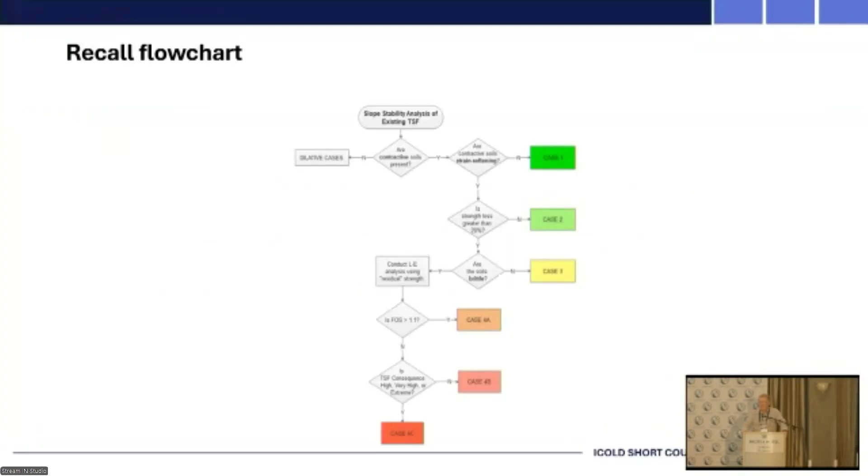So, talking about limit equilibrium methods, this is a flowchart. I said recall the flowchart. In fact, it's preceding the presentation on the flowchart that's going to be given directly after my 3 presentations, about different cases and how to deal with them, dilative versus contractive and so on. I'm not going to dwell on that, but hopefully there's some links with that, and also with what was said by Mauro. Now, in terms of the types of stability analyses, to try and encapsulate the way currently used,

a drained analysis that's appropriate to dilative soils uses effective stress parameters. There's no excess positive pore pressures present from shearing. You can use limit equilibrium using the friction angle, targeting a factor of safety. And that's what's called for in current documents, things like SANCOLD, etc.

Undrained analysis, which some people have taken a while to accept, is assessing the likelihood that contractive undrained shearing could be initiated. You could do limit equilibrium, or increasingly numerical modeling. We've had a student recently do comparisons using 2 different software packages on a calibrated Norsand model, and you don't get the same answers. So we do have to be a little interrogative of numerical models.

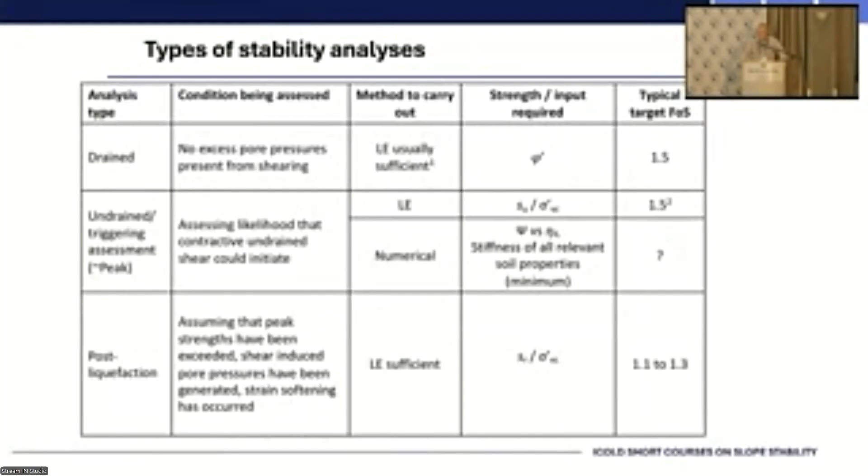If you use limit equilibrium with peak undrained shear strength, you target a factor of safety of 1.5 again. And then post-liquefaction—I prefer the term large strain—assumes that peak strengths have been exceeded, and we've generated positive excess pore pressures in that process, initiating some form of strain softening. Currently, limit equilibrium is the go-to, but this is where things get quite gnarly, and where we're going to maybe have some debate today: what target factor of safety do we use, what strength ratio, how do we derive it, etc. And the implications, which some of you are painfully aware of in terms of costs of buttressing. But this is where we are currently.

It's by far the most widely used approach at the moment. Most design offices will have people working on stability analysis using limit equilibrium, but it does suffer from limitations. We've heard some of them today, particularly for soils that are brittle. And what is brittle versus merely strain softening is perhaps another long debate. But when talking about progressive failure or static liquefaction, these methods do have limitations, certainly. And specifically for highly brittle tailings—tailings that lose strength over a very small amount of strain—you have very significant stress redistribution.

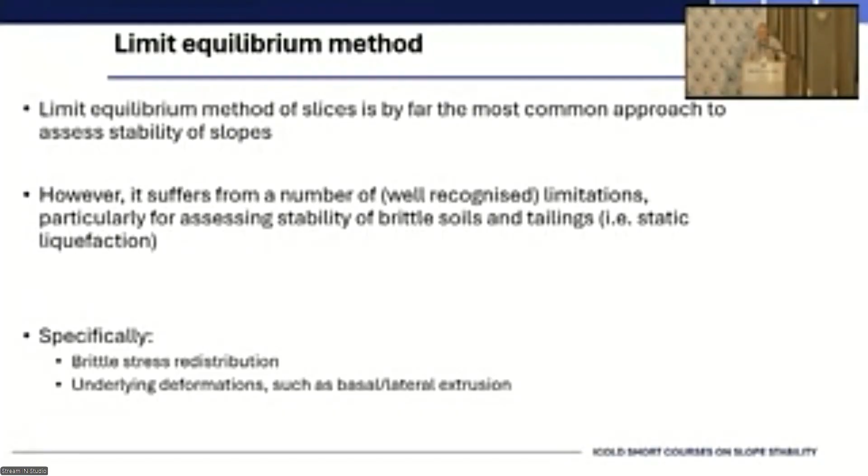And then there's also the lack of accounting for different strengths. Andy was mentioning that in terms of the Mount Polley case, you've got different stress-strain curves, so you may have a very brittle tailings overlying a ductile foundation. There are all these limitations, but sometimes these limitations are not as restrictive, and you can use limit equilibrium with a little more confidence. But nevertheless, we do recognize these.

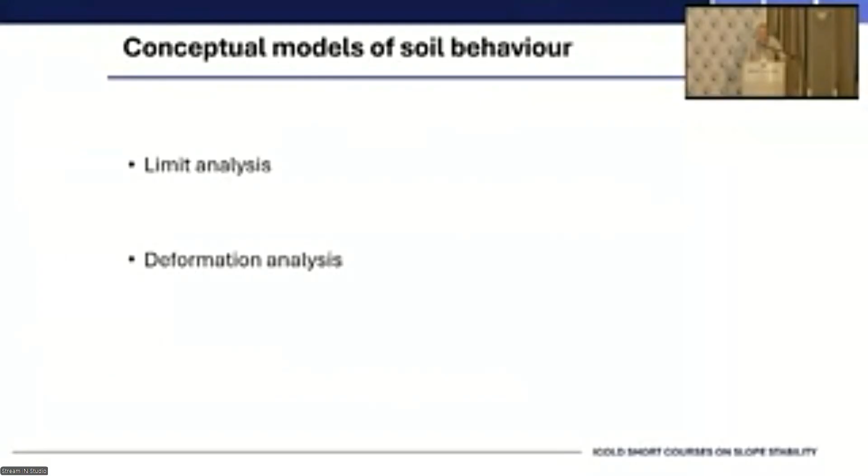It's purely something in space that's just been subjected to stresses, and once you mobilize the limiting strength condition, that's when failure occurs. As Mauro was showing you, implicit in the assumption is that you get the same strength mobilized at the base of every slice, which we know is certainly not the case for brittle type failure.

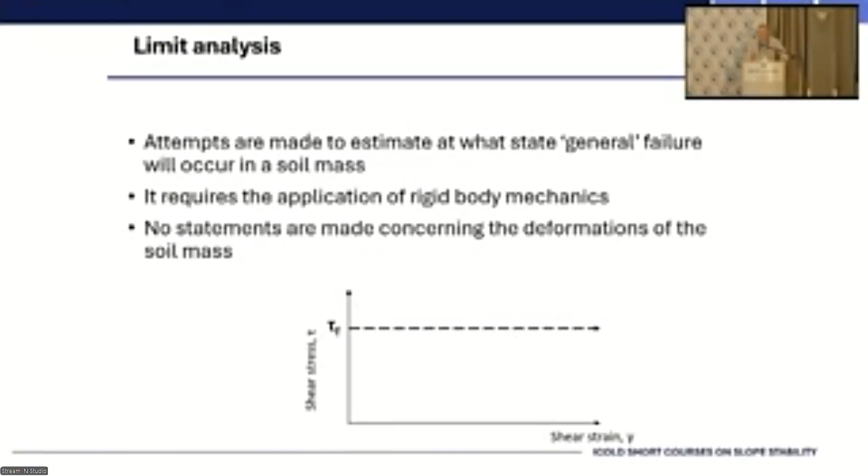Undrained strength is expressed such that the maximum shear stress is the undrained shear strength. Often we then normalize that with the vertical effective stress, and thankfully software programs these days can incorporate that pretty successfully, because you do get this effective consolidation with depth, the sample gets denser, hence the undrained strength is greater.

Contrast that with the drained strength, where we have these two components. I think everybody's familiar with that. But then that bottom statement is something that Louis touched on yesterday: the key to having a drained condition is the fact that the shearing is applied at such a rate that the excess pore pressure generated can be dissipated faster than the rate of load application.

So in a sand, normally if you're applying a shear stress, say building a high-rise structure, the rate of construction is such that the pore pressures dissipate far quicker than the rate of loading applied. But if we apply the load faster than we can dissipate, we can still get these excess pore pressures in sands, and hence we get undrained type behavior, that shear-induced pore pressure.

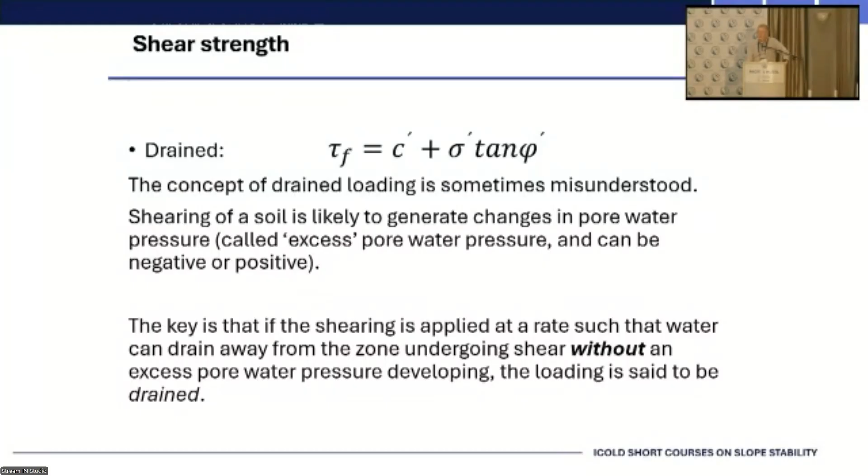The second way of thinking about a soil, certainly to start with, was the initial approach of a deformation analysis. You've got stress and strain, you've got the Young's modulus, the relation between them. If you do a simple elastic analysis, there's absolutely no limit on the amount of stress you can generate. You don't have a condition. So we all know soil is completely different to that.

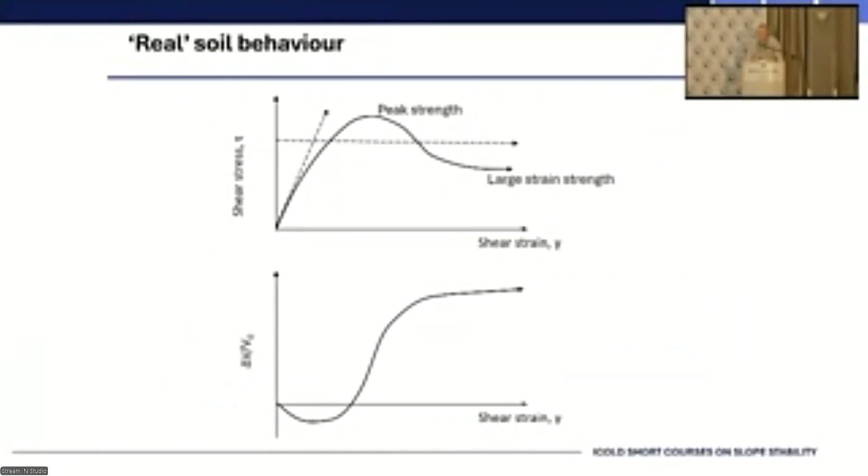We get maybe an elastic, pseudo-elastic behavior to start with. We get a peak strength, maybe a large strain strength, etc. I'll just superimpose those two simple models, the rigid body and the elastic, on that. But we have to actually have something that incorporates both of those, and not only that, but takes account of changes in volumetric strain - that's the bottom curve there, volumetric strain over, or change in volume from initial volume, or change in pore pressure. So it gets far more complicated.

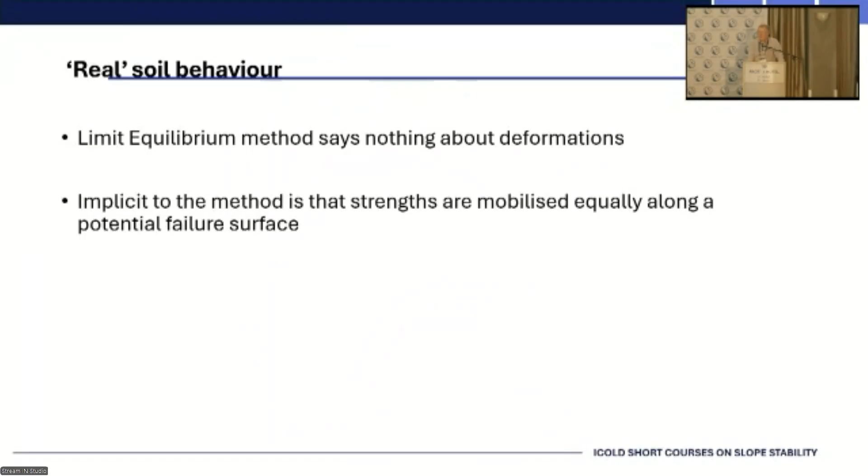So so-called real soil behavior, limit equilibrium says nothing about that. And as Mara said, implicit is the fact that the strengths are mobilized equally throughout the failure surface.

So can FLAC or other software provide some insights? Clearly you can utilize a much more realistic stress-strain behavior. You can include strain softening. Now you can include this through forcing it to behave in a certain way, or you can have it incorporated in the model itself, such as the NorSand model.

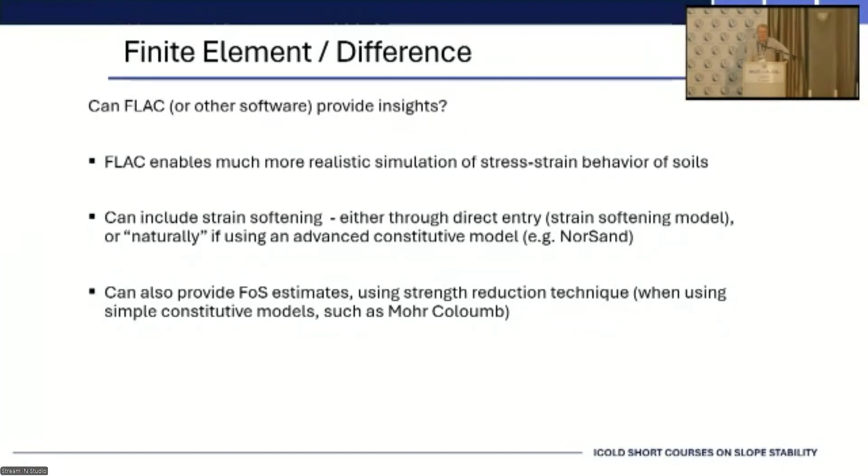And you can also use it to get factor of safety estimates using a strength reduction method, which can be very, very powerful. But that's usually when you use a simple model such as Mohr-Coulomb. I think one has to be cautious with the strength reduction method as well, much like limit equilibrium, when you have soils with different stress-strain characteristics. Because if you think about it, you're usually reducing the strength equally through all soils, but some of them mobilize peak strength at much different deformations than others.

Nevertheless, let's look at a simple hypothetical tailings profile here.

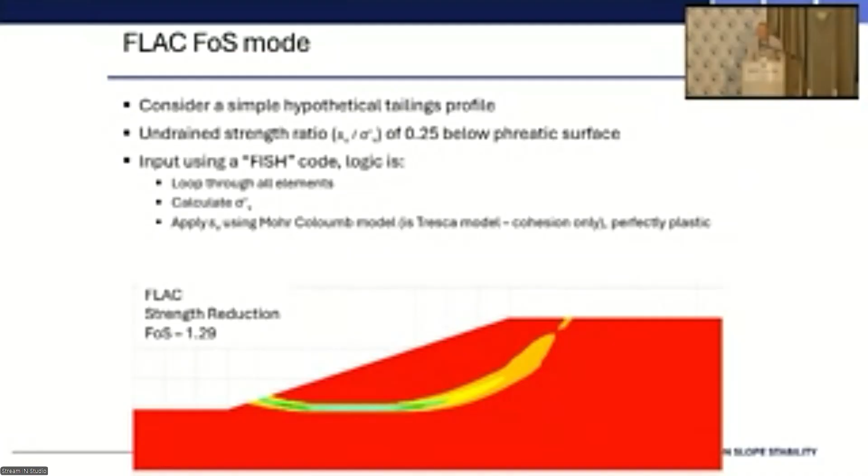We've got an undrained strength ratio of 0.25 below the phreatic surface. You loop through this, reduce the strength, and get a factor of safety of 1.29 - that's the predicted potential failure surface. Running an optimized Morgenstern and Price with strength profiles in that green wedge, the contractive zone is 0.25, and above it we just assume drained strengths, which is what many people do. You get 1.26, so that's pretty good agreement. But as soon as you get more complex geometries or zones, the strength reduction method isn't necessarily going to give you exactly the same answer.

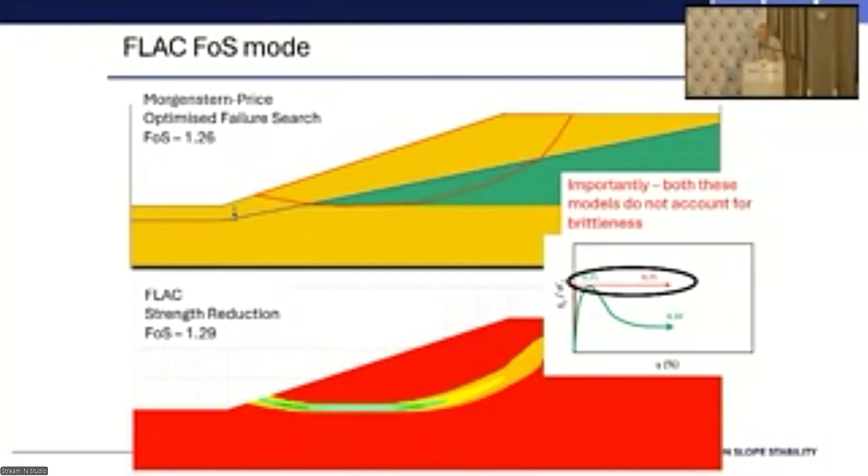So you can use FLAC to perhaps locate the most likely failure surface, and increasingly limit equilibrium is giving you more flexibility in getting the most likely failure surface as well, for simple cases. But in these terms, they don't account for the stress-strain behavior and certainly not brittleness, even the Mohr-Coulomb strength reduction method.

We'll hear probably more about this later on. This is the ICOLD bulletin looking at different stress-strain behavior. They've got three zones, ranging from highly brittle up to generally non-brittle. So you might have the same normalized peak strength but get very different post-peak strengths. We mentioned the Bishop's Brittleness Index yesterday, but there's a lot more to that - it's what happens post-peak and how we characterize that adequately.

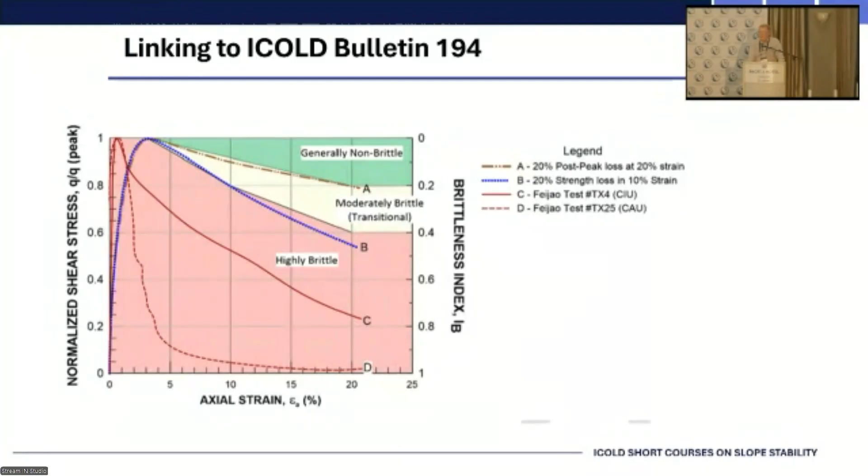This really comes to the point of monitoring. Which of those would you be comfortable having confidence that you can monitor for incipient failure and post-failure conditions, and which would you not be?

We hear a lot about InSAR. Here we've got three sets of data that we processed. The top set of 3 lines was from a gold tailings storage facility in WA, where we're getting displacements over substantial time that we have this data. The bottom solid curve is from Zelazny Most in Poland, probably the biggest tailings storage facility in Europe. The one in between, the 3 lines there, are various measurements made at Feijão or Brumadinho.

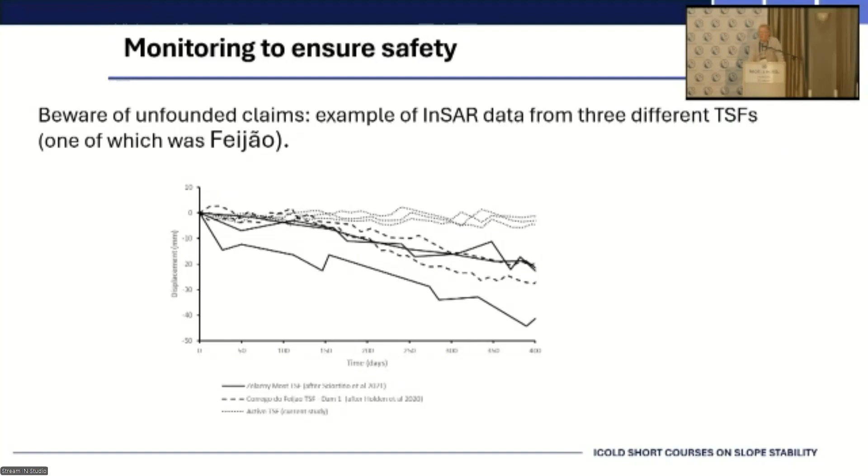Now, there's been claims that the failure at Brumadinho could have been predicted using InSAR. I'm not sure on what basis they're always made, because the one below is experiencing much greater deformations, and it's still standing, and it's a very significant structure. So in the absence of tying that to accurate deformation modeling and being able to predict the potential failure on that basis, I think one has to be really careful of these kinds of approaches to supposedly monitoring to ensure safety.

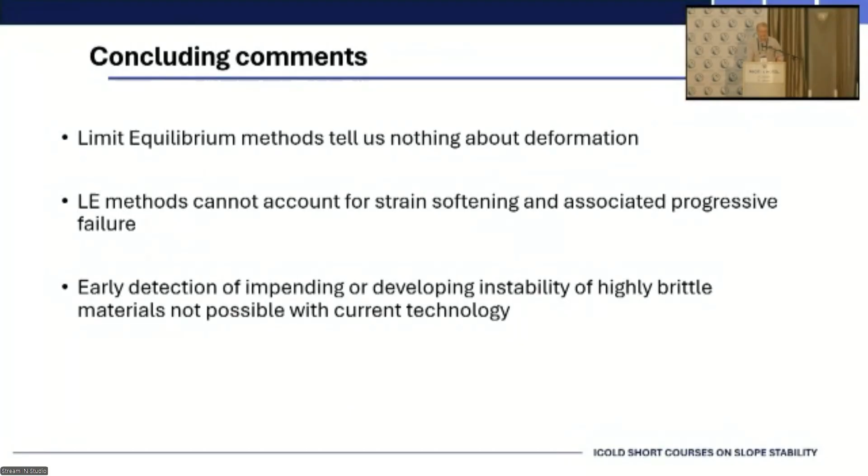So just to note, limit equilibrium tells us nothing about deformation. It can't account for strain softening and progressive failure. And early detection of developing instability is a real tough one with current technology. I'm not aware of any technology currently available that we can use to detect an impending potential failure triggering occurring in highly brittle materials. Be interested if anybody else has thoughts on that.

Thank you. So moving on to deformations and thinking about targets, etc. Here's some data from clay-like tailings, direct simple shear tests. These had different biases imposed. Talked about bias yesterday - that's when you consolidate it in the device under some imposed shear stress, so it's not just K0 consolidated. And you'll see you get very different behavior.

The bottom curve is when it's zero bias, K0 consolidated, and you get a peak mobilized at a strain there of probably 25%, then gradual loss in strength. Whereas if you've consolidated under bias, you get a higher undrained strength ratio, but post-peak it's kind of much worse because you're getting a much more significant loss in strength with strain. So setting targets for perhaps monitoring, doing the tests that capture the right behavior is going to be really crucial.

And in this case, eventually they kind of converge perhaps on a large strain strength, but we still haven't stabilized. We still haven't got to a limiting condition in this case.

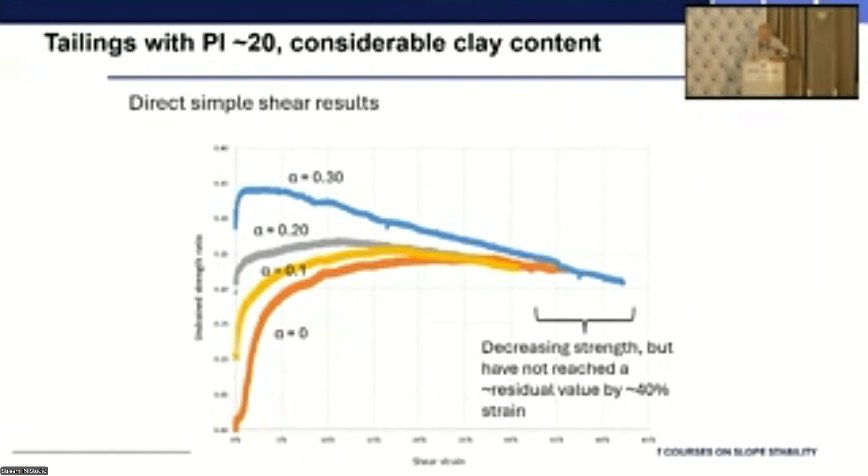Now, the DSS, we see that being used a lot for predicting large strain strengths. But the trouble is, you really don't mobilize a lot of displacement in the direct simple shear apparatus. People have used it in the same way as the old style direct shear box was used, where you shear it in one direction, then reverse, and shear it in the other direction, going backwards and forwards. That's one approach. But I think, as with the old style shear box, you get a lot of particle rearrangement, and a lot of peaks and troughs. It's very non-uniform.

We're also finding that when we compare direct simple shear results with hollow cylinder results carried out under the same stress path, the hollow cylinder shows you much lower large strain strengths. And that's another entire debate.

But here we've got some data from shear vanes done on the same material, and the blue line is using what's called a constant volume ring shear device. So there you can do large strain, undrained shear strength ratios. You can see quite similar peak values, but in two cases you're able to monitor and get some handle on the large strain strength. Interestingly enough, for this material, those are at strength ratios way higher than we sometimes see in the literature for clay-like material, but 0.15, maybe 0.13 for large strain strengths.

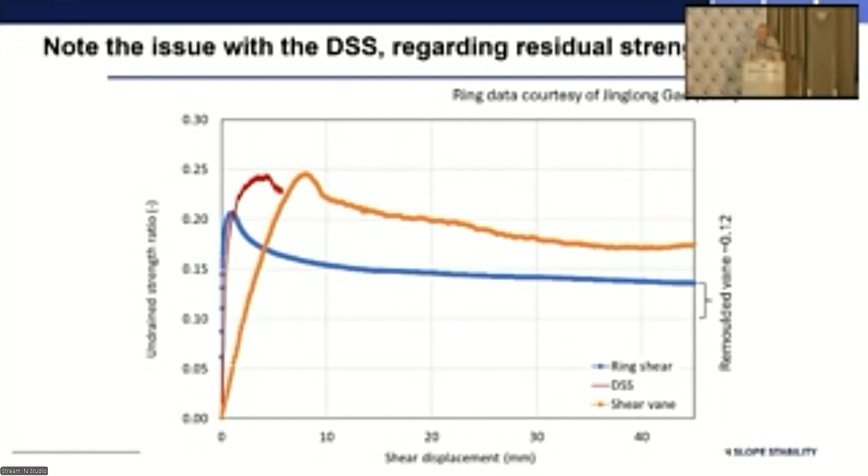And incidentally, the remolded vane, where the vane was turned at high rates of rotation, gives about 0.12. So DSS is, I think, great for getting peak strengths, but it has to be used with caution for large strain strengths.

So there's significant differences in the stress strain behavior that we're getting from those plots. That could be from a number of factors. I won't dwell on those, but as we explore these different devices becoming commonplace, perhaps some numerical modeling of the devices themselves is actually required to better understand what's going on.

There's also, we know, that you can get different stress strain post-peak behavior depending on the rate of shear. I talked yesterday about the need to shear the vane fast enough to make sure we get undrained peak strengths. But then what about undrained large strain strengths? Do we need to change the rate of shear of the vane during the test itself?

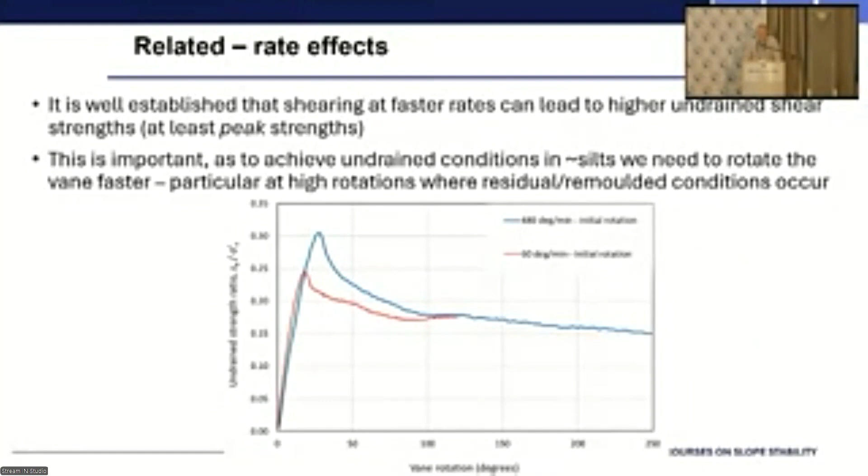There's not a lot of data in the literature on rate effects on the large strain strength. So we need to ensure that the vane rotation rate is capturing peak undrained as well as large strain undrained.

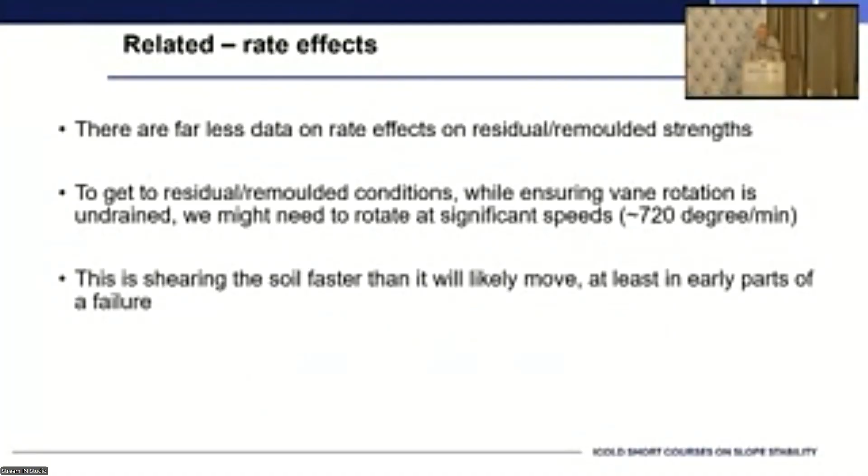And people are doing it at very high rates, 720 degrees a minute. Compare that with the conventional rates that the vane is specified at, much, much higher. But just note that that's applying a shear rate which is much faster than we'll probably see in a failure condition in the field. So is that perhaps being unrealistic in terms of rate effects again?

So when setting these, or when thinking about these, the need to capture this post-peak behavior, there's a lot of complexities involved.

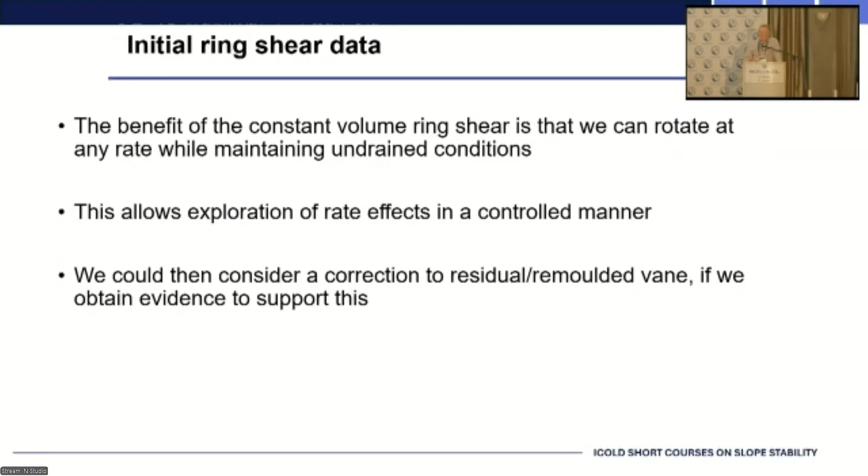I've mentioned this constant volume ring shear device, similar to the ring shear I talked about yesterday. The trouble with a conventional Bromhead type ring shear device is that as you're shearing the material, it can either dilate or contract in response to the shearing, so you're getting a change in volume. The constant volume ring shear device keeps the volume constant by keeping the height constant. It's a tricky device to use, but then we can start looking at rate effects in a more controlled manner. Perhaps by comparing this device with many other kinds of devices, vane, etc., we can start choosing these large strain strengths more rationally in the future.

So here we've got some data. This is large strain strength ratio against what we've called peripheral velocity, trying to relate the velocity at the tip of the vane, or the edge of the vane faces, converting that to a velocity, and comparing that with the ring shear, the constant volume ring shear. You can see that the agreement there is really not bad when you compare it with a lot of traditional plots of strength.

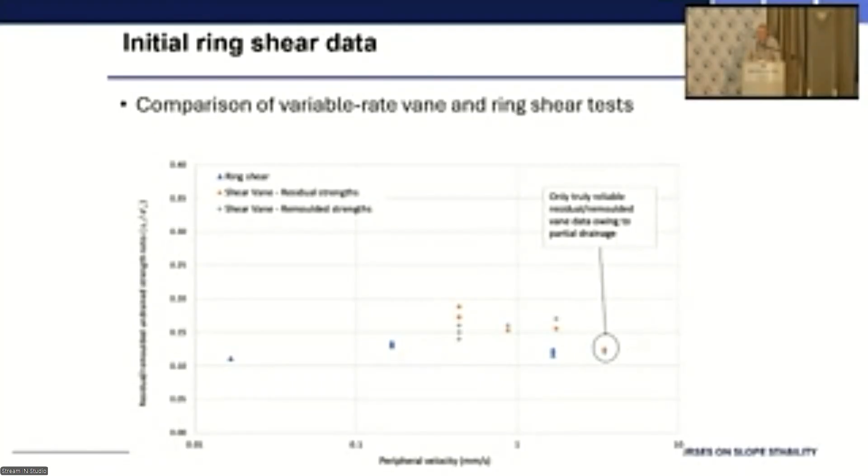That variation of 0.02 or so is really pretty good, but it's also indicating the effect of shearing velocity or shearing rate on the large strain undrained shear strength. So you're probably getting some kind of small viscosity effects there.

So thinking about brittleness and how we accommodate that, using Mohr-Coulomb is not really that much better than limit equilibrium when dealing with brittleness. But what David did here is play with the model to include some strain softening, in a pretty simple manner, within Mohr-Coulomb, not NorSand.

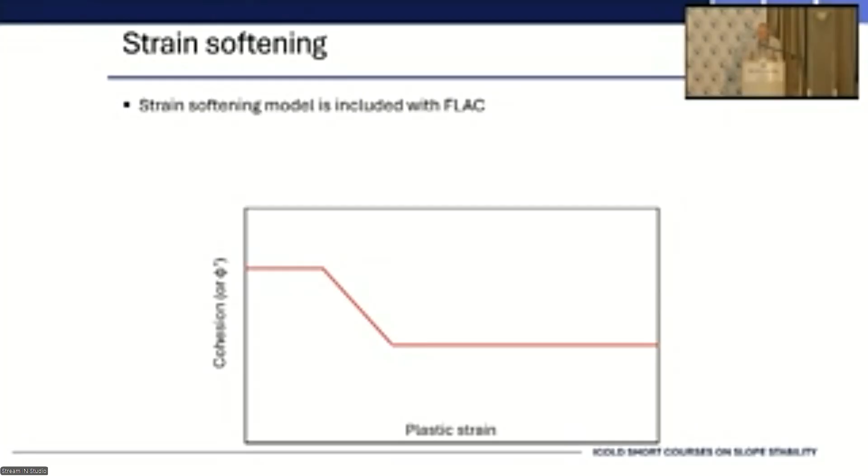You have this ability to do some sort of pseudo strain softening. You can decrease the cohesion, you can decrease the friction angle with some measure of plastic strain. Now, this is not meant to indicate this is realistic behavior, it's indicative behavior of strain softening. So keep that in mind.

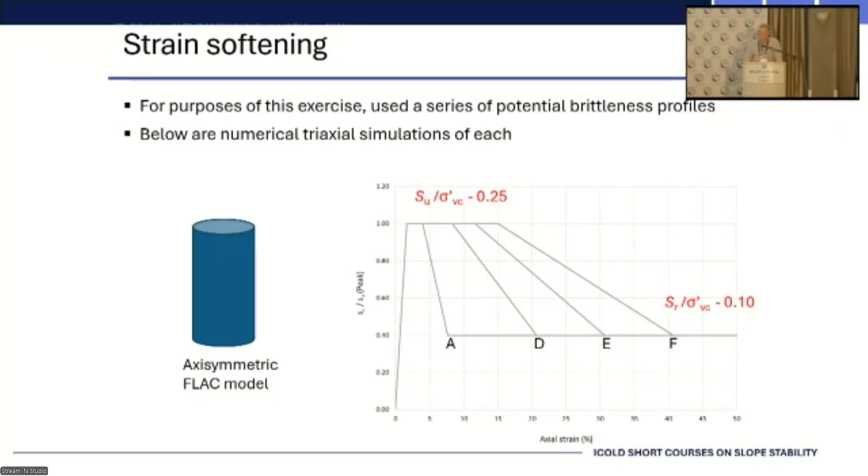But if you look at different versions of that strain softening, same peak undrained shear strength, SU over sigma V dashed of 0.25, and same post-peak of 0.1, but different strains to mobilize that large strain. So what do we get? Well, firstly, to point out that it's now effectively a range of brittleness, if we use the term brittleness to include the kind of strain over which the loss of strength occurs.

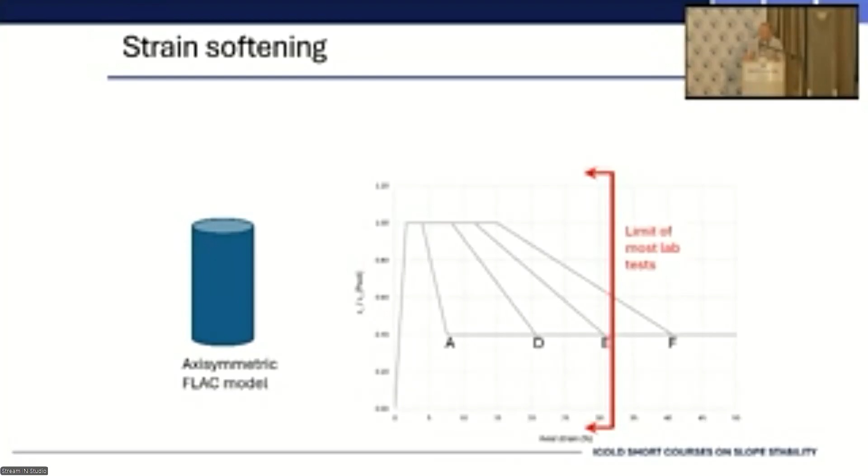But just emphasize, identical peak and post-peak, identical initial elastic modulus. Also to point out that in a lot of laboratory tests, it's really hard to get beyond about 30% strain, probably 25% strain. And so we can sometimes lose that kind of behavior I'm indicating here.

But what was done is to activate these different strain softening models in the contractive zone of that hypothetical problem shown earlier and see what happens. And in fact, it becomes very dependent on that rate of loss of strength.

Whereas the two on the right-hand side that showed the same loss of strength, it didn't fail. It mobilized quite large displacements and had a zone of plasticity developing where the strength was mobilized, but it didn't propagate throughout.

So this is perhaps giving us some confidence in the concept of using numerical modeling, because we can capture this behavior, and it can sometimes lead to a situation where we don't get outright failure occurring. But then we have to have absolute confidence in the numerical model, and I'm afraid we're not there yet. And I really think selling that to regulators is going to be difficult.

But I think if we went through a process of these kind of simplified illustrations, compared it to the limit equilibrium, and then showed that to people, we can start getting a bit more buy-in from all the kind of groups that matter.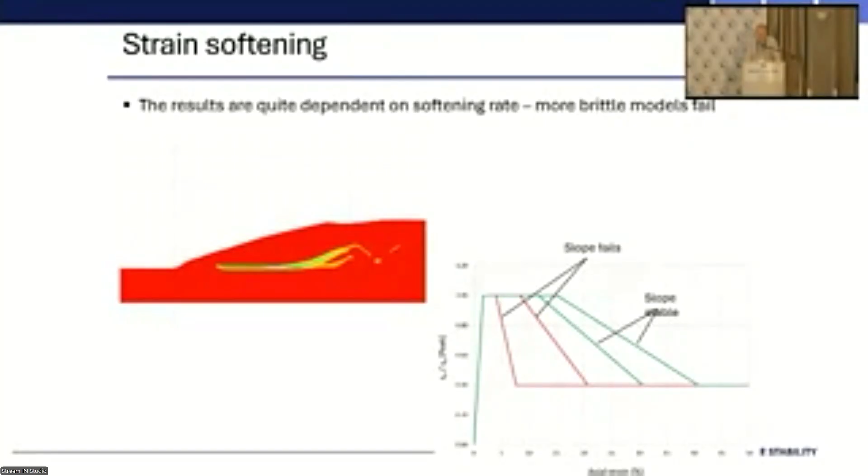And just incidentally, superimposed on that is some so-called real data, Mount Polley, that dashed line, which behaved very much like that less rapid strain, or less rapid loss in strength. Whereas the silica fine sand that I've referred to before, or the standard laboratory sand we use for a lot of our model calibrations, is even more brittle than the most left-hand of those curves.

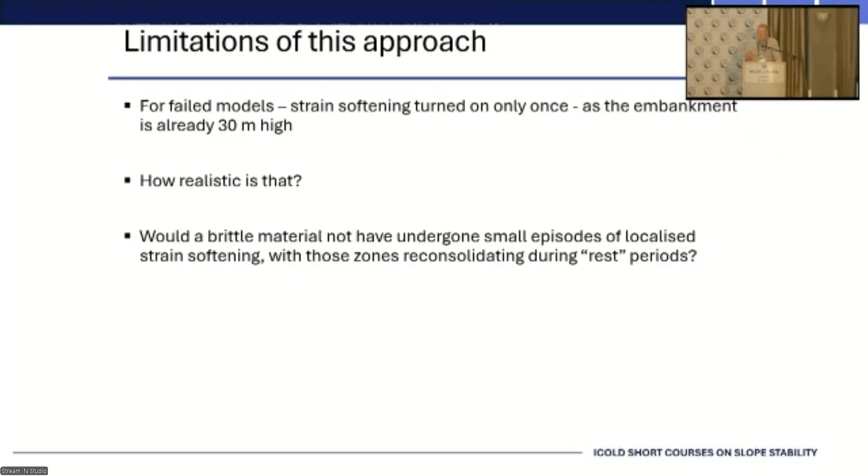Now, it's limited. That stress strain behavior was kind of turned on somewhere through the modeling. If you'd built it up in layers, trying to reproduce some kind of realistic history, it probably would have been different, because you would have had some localized strain softening and then perhaps reconsolidation, etc. So these are all aspects that a realistic numerical model may need to capture.

But that aside, I think it just illustrates the key point I'm trying to communicate, which is, let's be clear what we mean by brittleness. It's not just the Bishop's brittleness index, it's the strain over which it occurs.

So maybe it would be better to model the life of the slope. That can be really tedious, because you're trying to work out what the deposition rates were, when, etc. But then we can use a constitutive model that captures this behavior organically, rather than in this false way that we've used here, rather than forcing it.

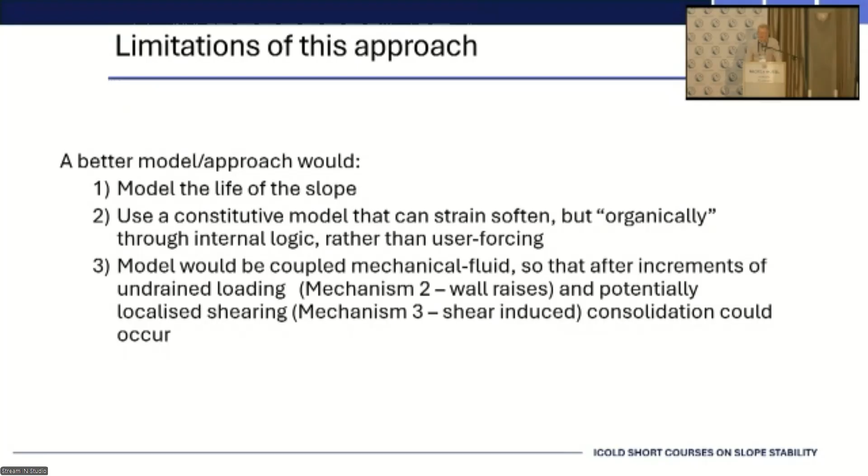And people have their preferences. A lot of people prefer the Norsand model, but there are people who prefer other models. And again, let's make sure we calibrate them realistically, not just based on one set of triaxial laboratory data.

But then that could also be coupled with fluid movement, some kind of completely coupled stress strain model where you get the migration of fluid at the same time as you're getting changes in stress conditions.

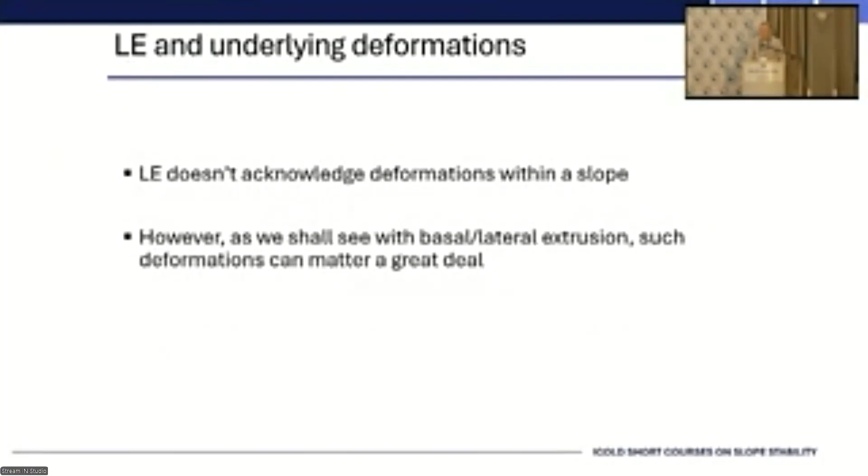So, key thing, as I've mentioned and Nara's mentioned, a few people, we don't capture this behavior with limit equilibrium. That is a severe limitation. But as we'll see in the next discussion as well, deformations such as in the basal extrusion failure mechanism are absolutely key.

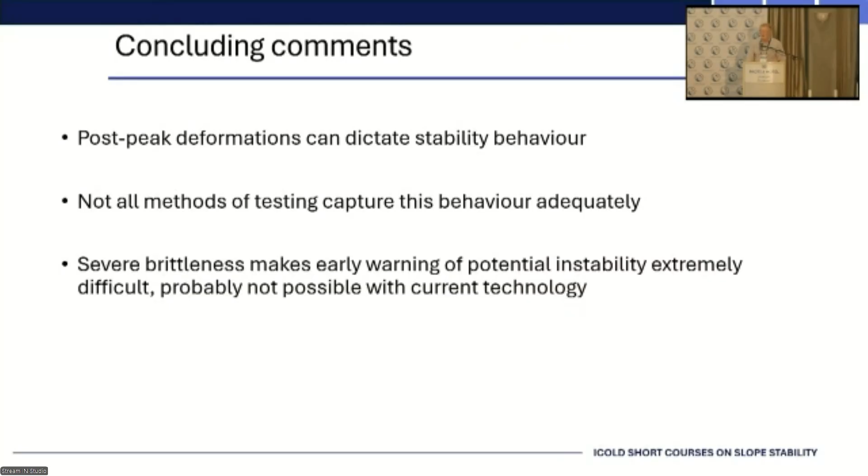So, some concluding comments on this discussion. Post-peak deformations can dictate stability, once you start mobilizing that reduced strength. Not all laboratory methods capture this adequately at the moment, and I want to keep emphasizing this: be careful about trying to monitor for something that at the moment is inherently, I think, impossible. We just don't have the technology at present.

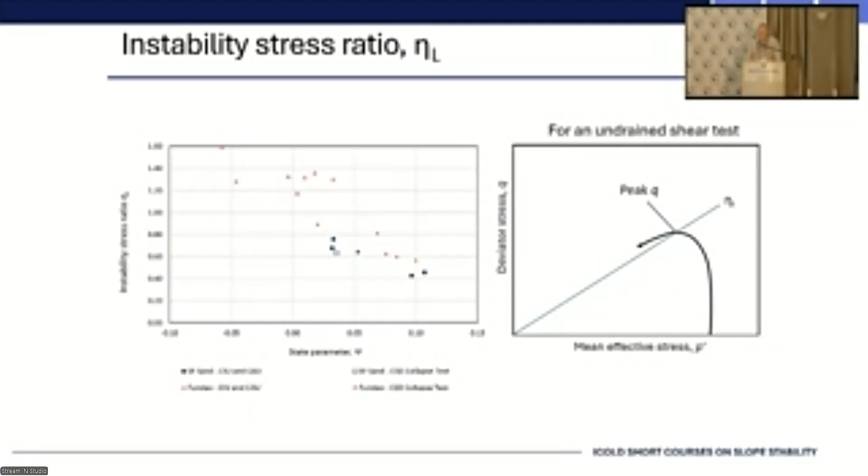But as you get further and further away from that 0 state parameter value, i.e. your state parameter is getting up to 0.1, you're getting a lower instability stress ratio. So you're triggering failure at lower peak, or at lower Q values, lower deviatoric stress values.

So the approach that a lot of people are using with triggering is to think about what are the plausible failure mechanisms that can occur. There are often 3 that I see again and again. The first is this so-called constant shear drained mechanism. Imagine here you've taken the sample up to a stress state, it's K0 consolidated. We had a bit of discussion yesterday about what that K0 value is likely to be, somewhere between 0.5 and 0.7.

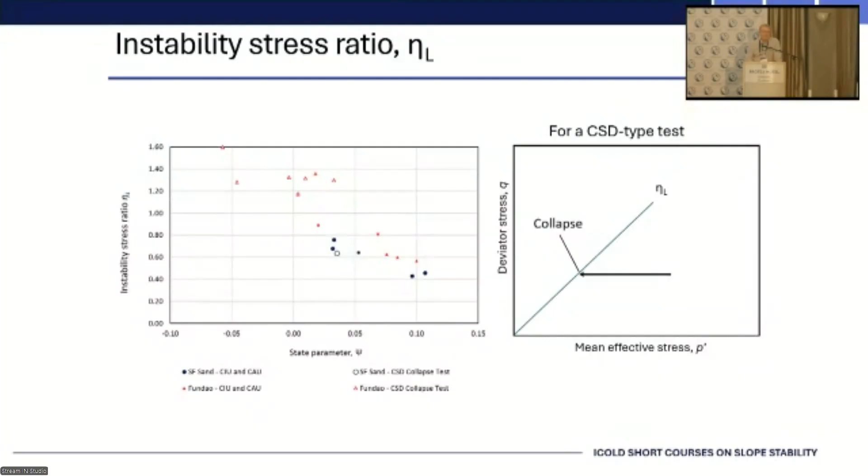Then the phreatic surface rises. Now, it's a little bit of an oversimplification to show it as a horizontal line going from right to left, because there's a bit of reduction in Q due to the unloading, but to all intents and purposes a horizontal line is adequate. So as we get that stress path being followed, we will potentially get to that instability line, at which point we get this contractive undrained shearing happening, and we can get the runaway failure taking place. So this is one stress path that we can think about for potential liquefaction triggering.

So in terms of these trigger mechanisms, a key feature is that we're actually increasing the ratio of shear stress to effective stress during that stress path. If you think about it, we're going from right to left - the shear stress is remaining the same, the mean stress is decreasing, so we're increasing the ratio. And the higher the ratio gets, the more likely we are to trigger what we talked about yesterday as mechanism 3: the undrained generation of excess pore pressures through the process of shearing.

So that's what happens in this rising phreatic surface, the constant shear drained failure stress path.

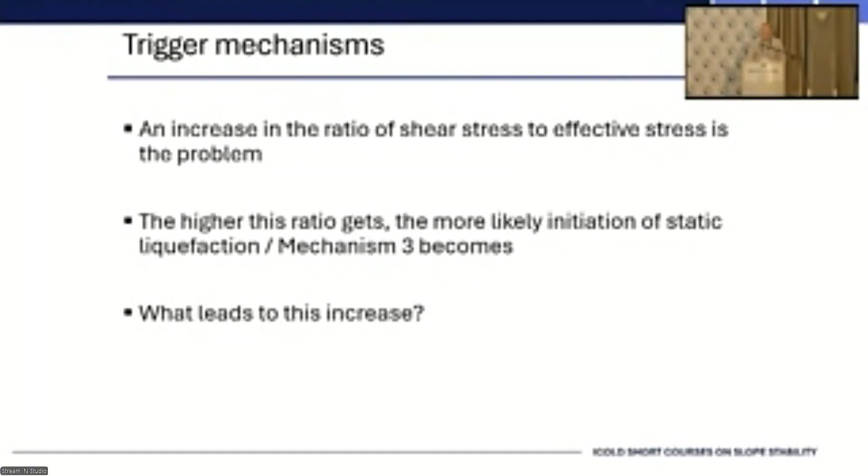Now, that's one mechanism. What else can trigger it? Well, perhaps placing a substantial new lift of tailings very rapidly is a potential trigger because it's increasing your shear stress quite rapidly. It's probably less likely to be a cause - I don't think we've seen too many triggered by lift placement, but maybe it can't be completely discarded. But anything that increases the shear stress ratio under either undrained or drained conditions is pushing us in the wrong direction, closer to that instability stress ratio.

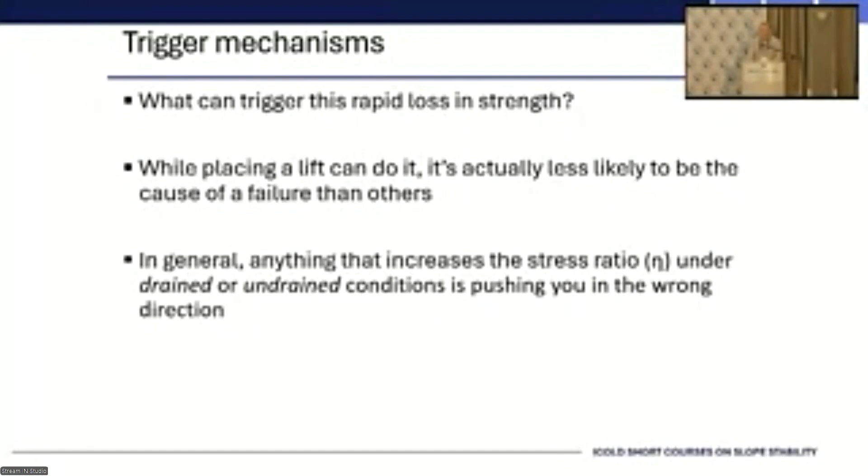And just to emphasize the point made yesterday, you can load it under purely drained conditions up to a point that's very close to, or even sometimes beyond, that instability line. But then when failure gets triggered - failure being this runaway generation of excess pore pressures - then you get this really dramatic loss in strength.

So let's revisit some of that. Here we've got the instability stress ratio for a particular state parameter of 0.05, so it's positive but not exceedingly so. The solid line is the friction ratio, probably MTC from triaxial compression, some starting point, K naught consolidated. Any one of those stress paths are increasing your stress ratio, Q over P dashed.

And what can cause those kind of stress paths? Well, we've talked about the one already, the rising phreatic surface. And in the Massachusetts dam example, they actually had data showing a phreatic surface, showing the piezometer, and they were able to capture the value of that pore pressure at the instant of failure.

And when they did the analyses, it was clearly not a drained failure that was occurring. It wasn't, even though the drained factor of safety was more than adequate, we've got this mechanism, three being triggered, and we had a runaway failure. So it's an interesting case study, that Massachusetts case study.

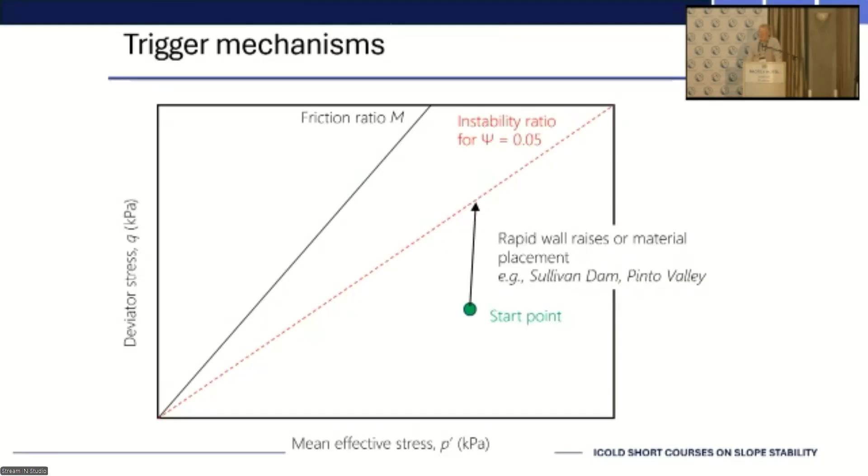We could have this rapid wall raise, or probably more likely some kind of other material placement. So where, again, it's a simplistic representation of a constant P dashed, but you're getting load taking you up to that instability line. There's the documented failure at Pinto Valley, where there was a TSF over which they were placing a waste rock dump as part of the

closure development. But they were placing it in very significant lifts, really high rate of loading, and triggered a static liquefaction at Pinto Valley. So it's not unknown.

And then somewhere, before I get to the lateral extrusion, you could even also have some kind of removal of material at the toe, giving you a change in P dashed.

But one that was probably ignored until Fundao, in our community largely, I think, was this phenomenon of lateral or basal extrusion. And the stress path is shown as, again, something simplified to be that starting point shown and then progressing to the instability line.

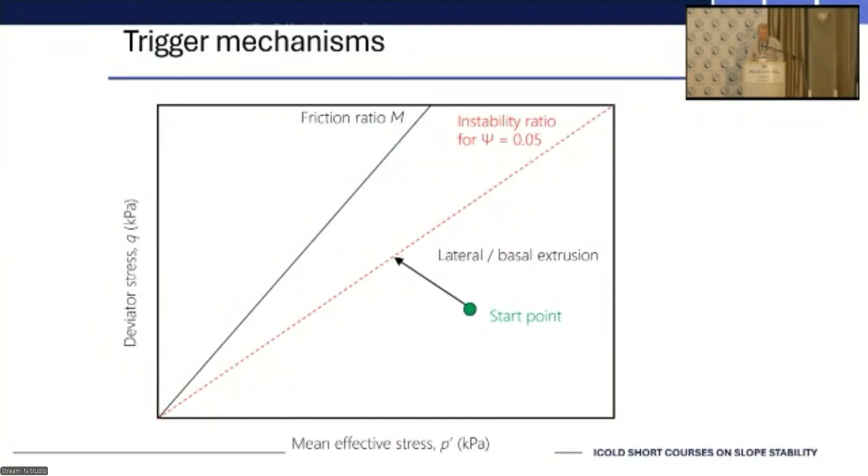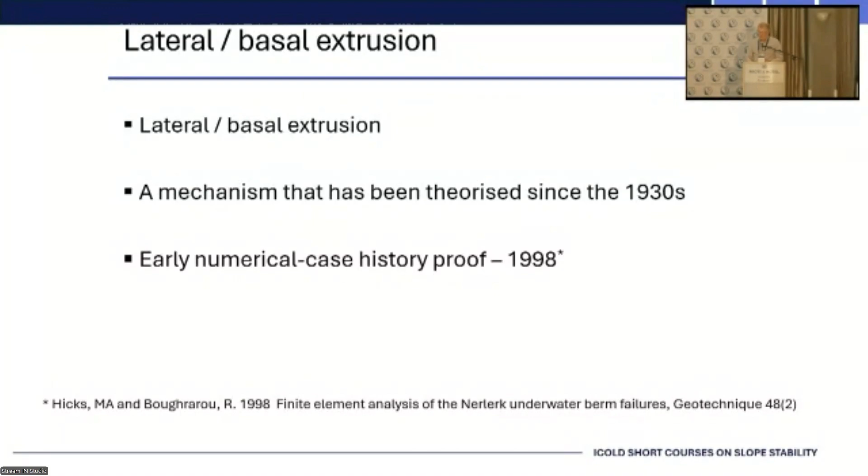So it's actually been around for a long time, and it's like most of these things - once you start digging, you realize that there's information in the literature that we probably have ignored. The whole concept of static liquefaction, in fact, this paper by Smith in the 1950s - if you go to Terzaghi's book, published in 1948, he uses a term called spontaneous liquefaction, which is no different to static liquefaction. But basal extrusion is quite a detailed study on one of these underwater berm failures back in 1998 as well. So even though it came to prominence after Fundao, there is other evidence that's looked at this mechanism as well. So what does it entail?

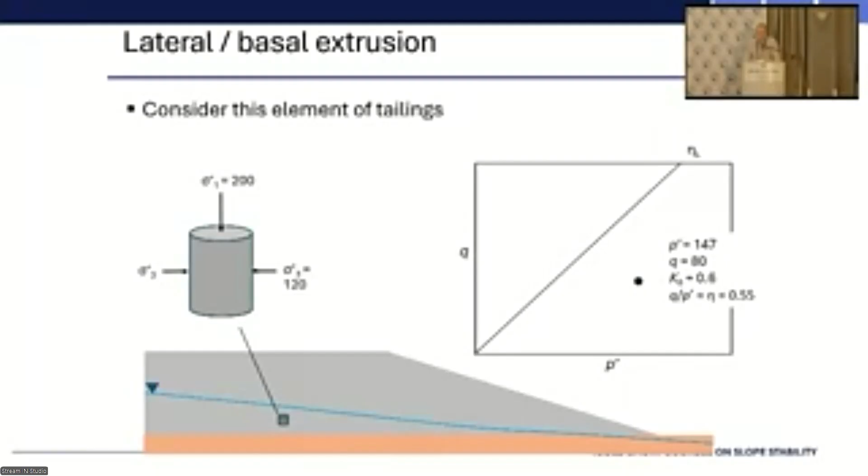Well, let's think of a TSF on a soft, ductile foundation. You've got an element of tailing shown there. It's under a certain confining stress. It's got a K naught of maybe 0.6. Starting stress ratio of 0.55 initially.

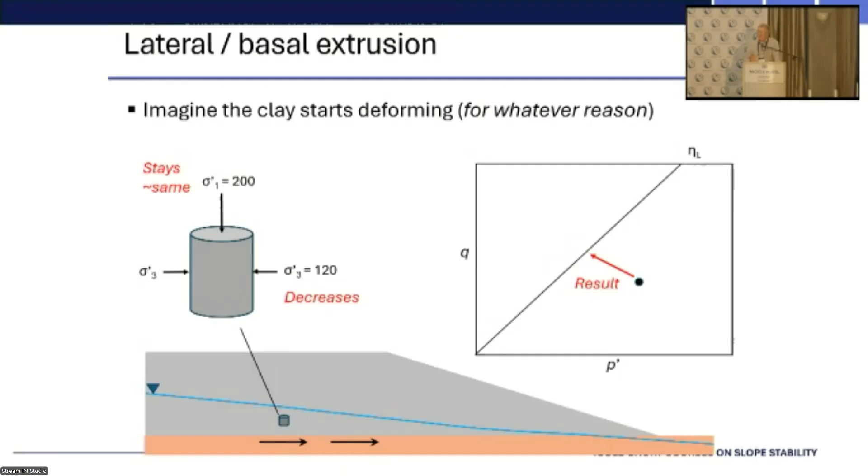Now that clay starts deforming. And it might have been deforming all along through creep, but maybe it's now starting to mobilize closer to its peak strength. So you're starting getting additional deformation. The overlying tailings is brittle. It doesn't follow that stress-strain curve as easily, but because it's experiencing this movement beneath it, it starts experiencing a decrease in the horizontal effective stress, still under the same stress-controlled vertical stress. So you get that resulting stress path shown there.

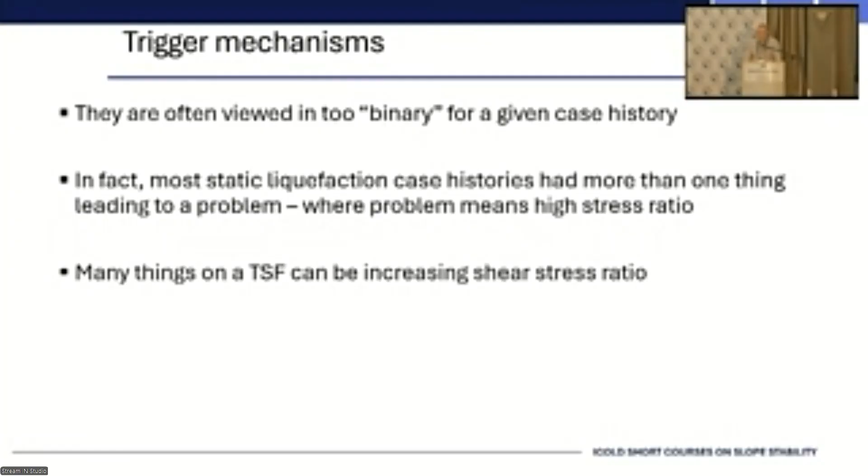A couple of comments to add to that: we often look at these in isolation - it's just either rising phreatic surface or lateral extrusion or rapid loading. But really, if you look at a lot of the case studies, there's probably a combination of more than one, all leading to a high stress ratio. So we can have many things going on at the same time, or contributing to that kind of triggering mechanism.

For example, you could have some creep from the underlying foundation soil, taking you up that stress path 1, and then a rising phreatic surface, and you're now really close to the instability line, so it doesn't take much of a rise to trigger the undrained shearing phenomenon. Alternatively, you could have the same initial basal extrusion, and then you place the waste rock dump on the TSF very rapidly, again triggering failure.

Or you could have a rising phreatic surface, taking you to a point where a small amount of basal extrusion can trigger it. So if people are going to be using trigger mechanism screening, or trigger mechanisms to kind of screen out potential failure, I think it's incumbent to not just look at one in isolation and then another in isolation, but what can conceivably happen at the TSF.

So is this then all we need to do? Is we screen this out? And I saw this a couple of years ago, where we know that a rising phreatic surface can cause triggering at a particular level of phreatic surface. So therefore, we ensure we've got enough piezometers to make sure that doesn't happen. Do the loading triggering? We screen that out. We know that we can control that. We make sure that we never place at more than such and such a rate. We screen that out.

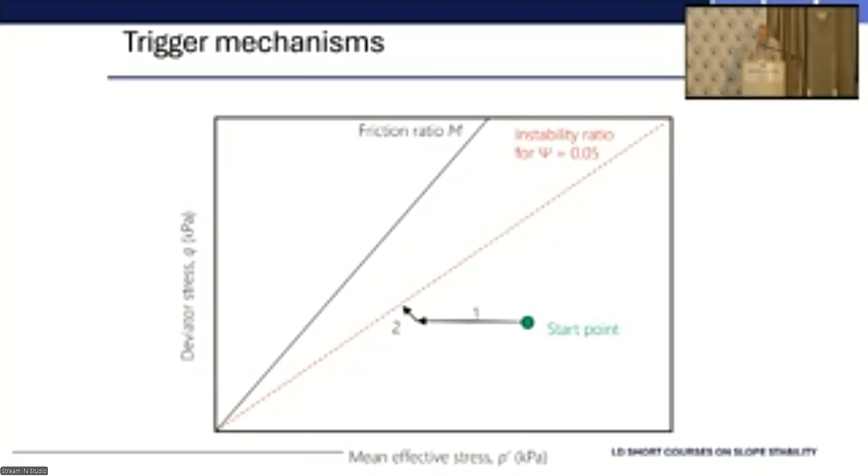Well, I don't know. This is probably a slide that is intentionally provocative. There's a phrase I've paraphrased here, a philosophy some people have advocated, saying: if the tailings can liquefy, assume it will. Two years ago, that was a very commonplace way to deal with this whole problem.

But we all know where that leads. It leads to calculating post-peak strengths, sometimes using—I don't want to say dodgy—unverified values that haven't been cross-correlated with many methods. But that's an approach: if it can liquefy, assume it will.

What's implicit in that is saying, okay, we've got these three trigger mechanisms we've looked at in some detail, and we've screened them out. Therefore, even if we have contractive tailings, we're confident we're not going to get a failure developing.

Given today's the election day, it seemed appropriate to quote a politician. You may remember this one: there's also the unknown unknowns—things we don't know.

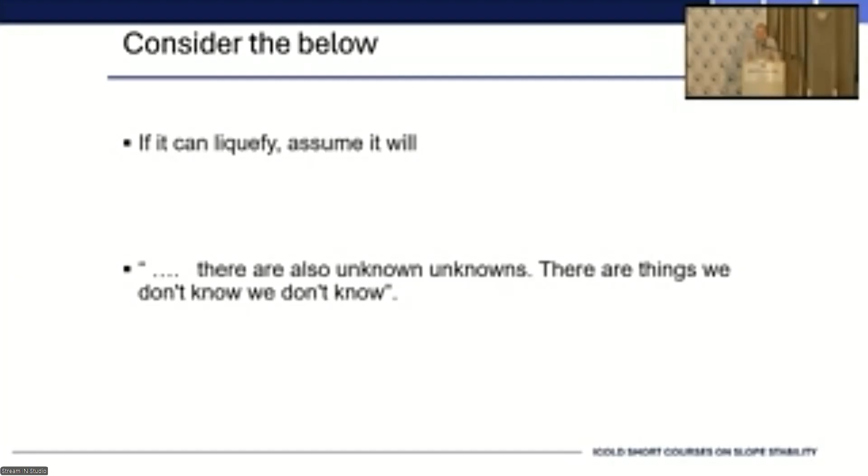Okay, so brittleness. When is it static liquefaction? When is it just a little bit of strain softening? We try and think about it in our lab testing and so on.

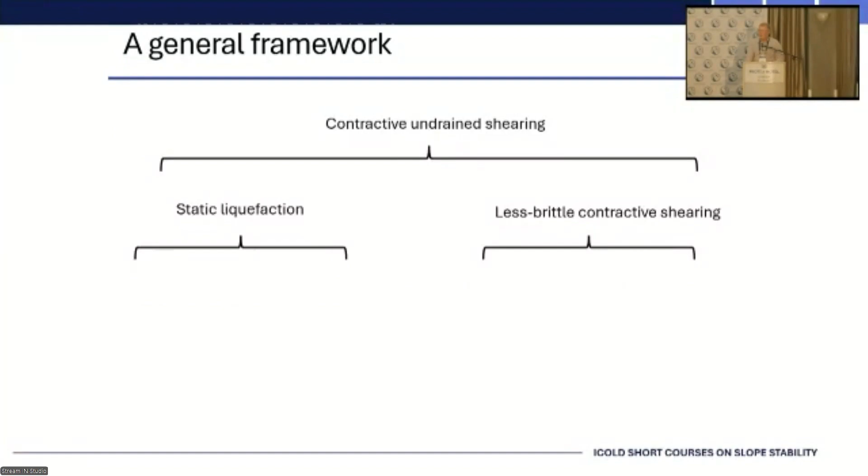Is contractive undrained behavior true static liquefaction—a rapid loss in strength—or less brittle contractive shearing, where brittle encompasses or encapsulates strain behavior as well? But then where's this division? Is it maybe a plasticity index of 10? Is it some measure of brittleness that goes beyond the Bishop index?

I had a paper presented at a conference in Mexico about five weeks ago, and I'm waiting for clearance to circulate it. But that looks at post-peak behavior as well as the brittleness index, to try and suggest another measure called the susceptibility index, which captures both aspects: the strength loss and the strain over which it occurs.

But we get this complete spectrum. We get the Fundão and the Mount Polley material from forensic reports. We get the sand from Fundão. We get, as a comparison, that silica fine sand again. And these are all isotropically consolidated.

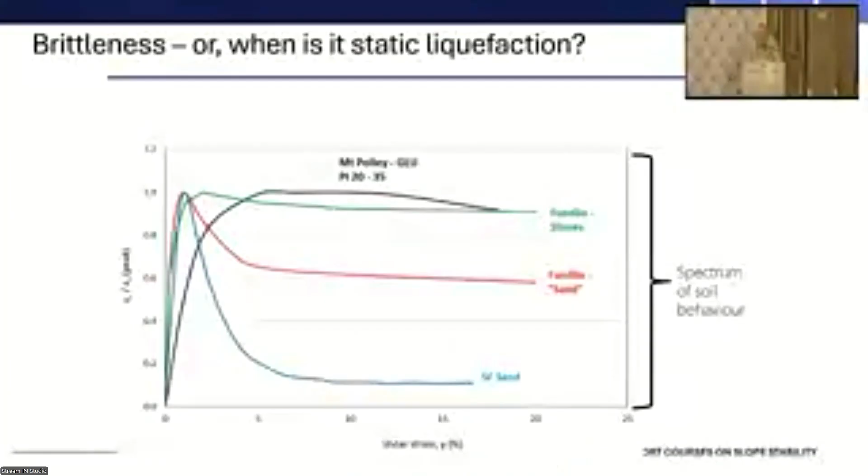So, wrapping up, and I'm going to kindly give Alecha about 4 minutes extra. Instability can be triggered by various mechanisms. We know that. If the tailings are at a state such that they're susceptible to contractive shearing, i.e. above the critical state line, the greater the value of that state parameter, probably the more susceptible it is to triggering.

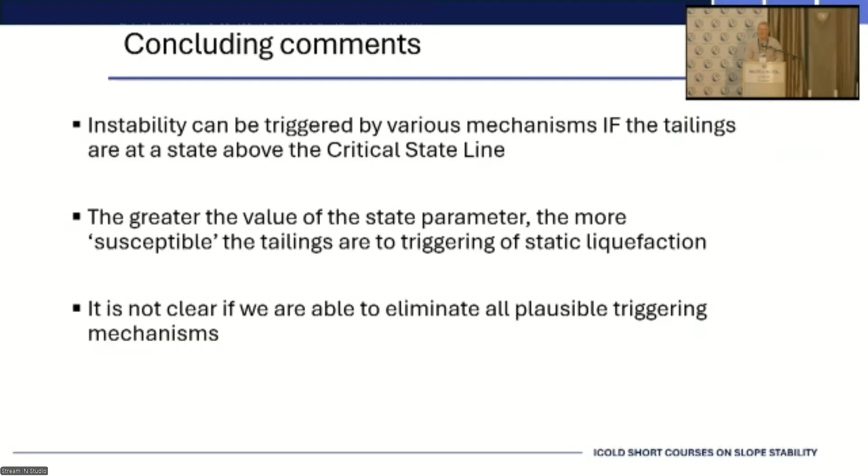But my view is that it's not clear that we're able to eliminate all plausible trigger mechanisms at this stage. And I hope I'm probably going to hear contrary views to that today, but that'll be great, because this is something that we're all struggling with, right? So hopefully we can get some debate on that. So I'm going to stop there.

There's a few minutes, but rather than take questions now, I think Alecha said he would appreciate any spare minutes I can send his way, so I'm going to do that. Okay, so thanks for that. We'll talk about this a bit more later on.

Thanks, Andy. I think we owe Andy a double clap there because he's now been through 8 presentations and now he can take a break. And Andy, we really appreciate your time and effort and your wisdom. Thank you for traveling and being with us in person. We really appreciate that as well.

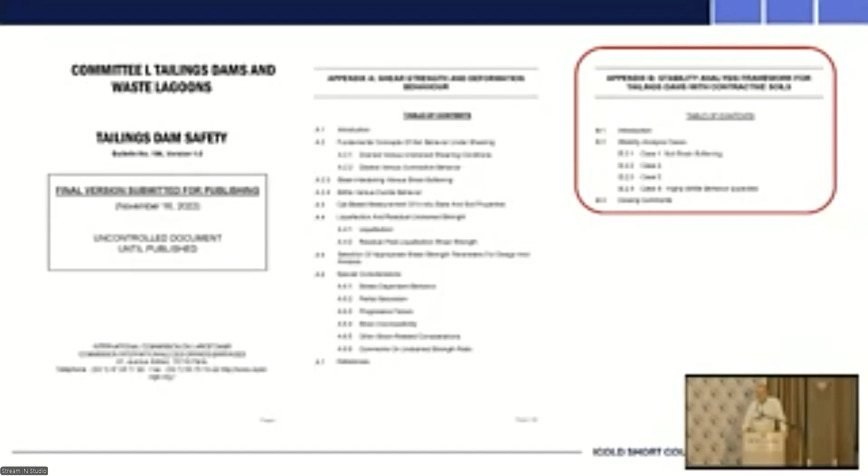Appendix A has been covered actually pretty well in yesterday's presentations and a few aspects of today. And then Appendix B is what I'm going to talk about today.

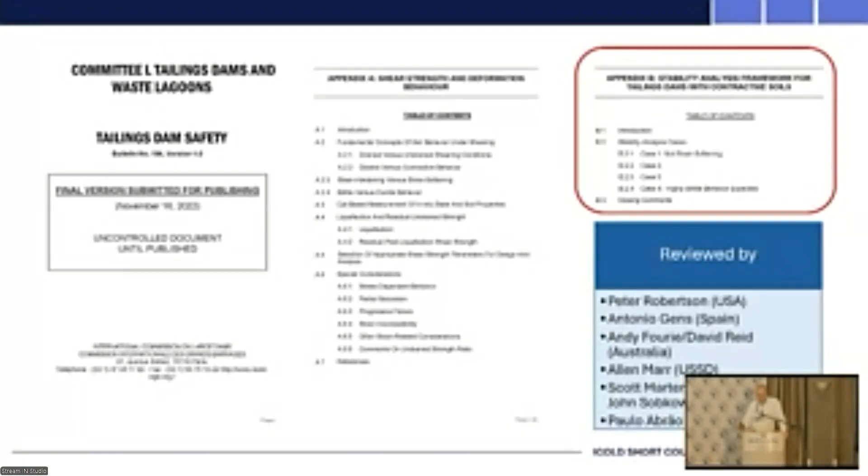And I would like to thank the reviewers, some fairly auspicious reviewers that we had that went over this, both Appendix A and Appendix B, including our esteemed Dr. Fourie and his colleague David Reid, as well as the others that are mentioned here. We really appreciate their contributions. David Reid in particular had a lot of comments that helped to make the document better.

In the main bulletin, you'll find this table 7.4, and it provides the recommended factors, minimum target factors of safety for 2 stability conditions: the static condition, which applies to both drained and undrained shear strengths, and then what we called in the bulletin the post-liquefaction condition. These are minimum target values, to be used unless justification can be provided for a lower value. And that's where Appendix B comes in, providing a logical basis to deviate from these target minimums.

And so what I said on the post-liquefaction, it's not my favorite term either. Andy has talked about how he doesn't like the term residual strength. He's not alone in that.

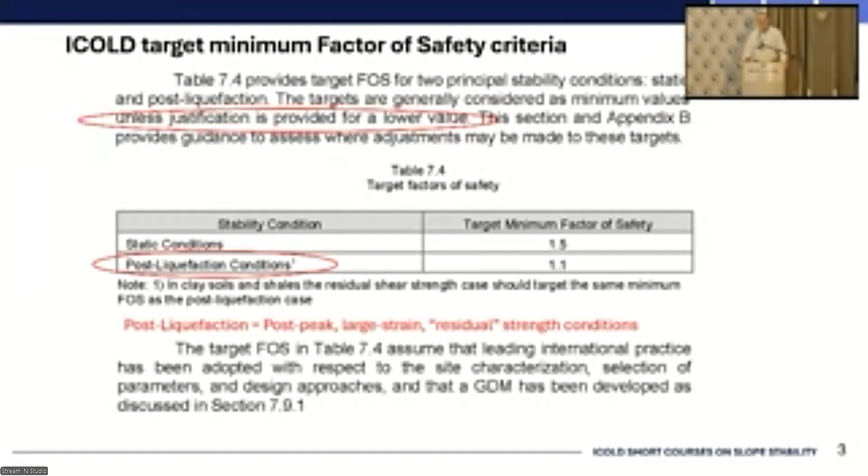I tend to prefer the large strain terminology that Andy prefers as well. It worries me sometimes though, because as you saw in that stress strain curve from Brumagino, you can actually have residual strength at small strains if you have a highly brittle material. So use this with caution and don't get too caught up with the terminology. I often call this the post-peak, large strain, residual, post-liquefaction strength, using all the terms just to cover everything.

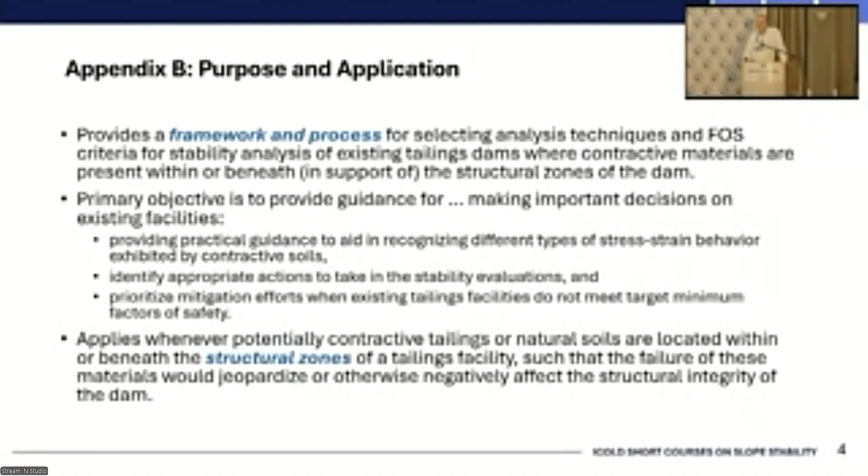The purpose of Appendix B was to provide a framework or logical process to help understand where we're at in the universe of possibilities, and to select analysis techniques suitable for that reality, and to select factor of safety criteria. It's primarily for existing tailings dams, wherever contractive materials are present, either within the structural zone or supporting the structural zone. I'll define what the structural zone is in a minute. It's not prescriptive—it's really meant to provide guidance for making important decisions.

So even though it was developed specifically for existing facilities, it could be applied to new facilities if you have contractive soils or contractive materials in the structural zones.

It's important to note that whenever possible, we should eliminate contractive materials from our structural zones, and we certainly need to avoid using brittle materials. To knowingly go into a design with a brittle failure mode is really not acceptable anymore, so we should try to avoid them.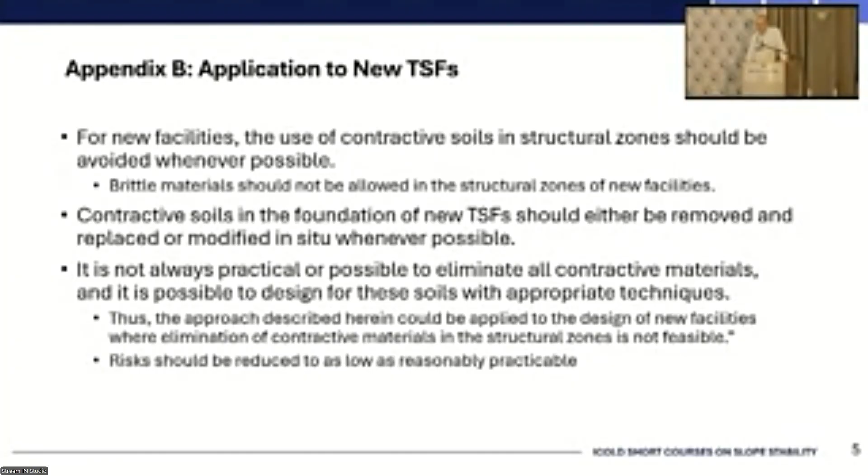This applies both to materials in the embankments and materials in the foundation. If you have materials in the foundation subject to brittle shearing or brittle failure, they should either be removed and replaced or modified in situ. But we recognize it's not always possible, or maybe at least practical, to remove all contractive materials, and therefore you can design against it—that's why we feel the approach can be used for new facilities.

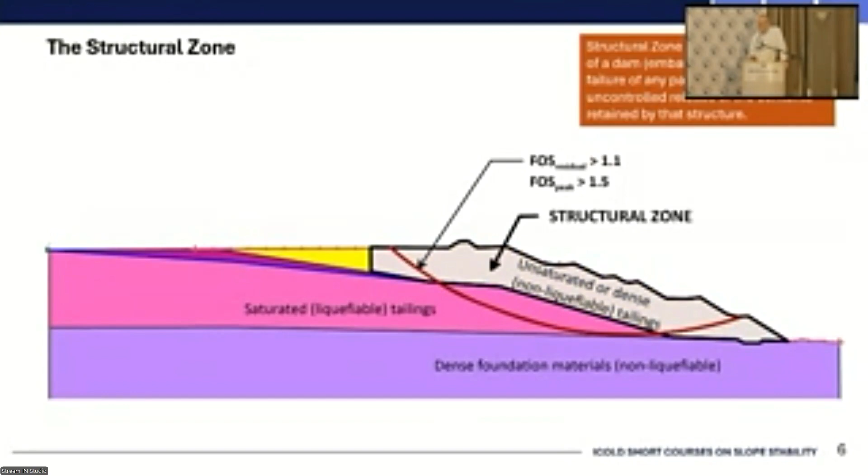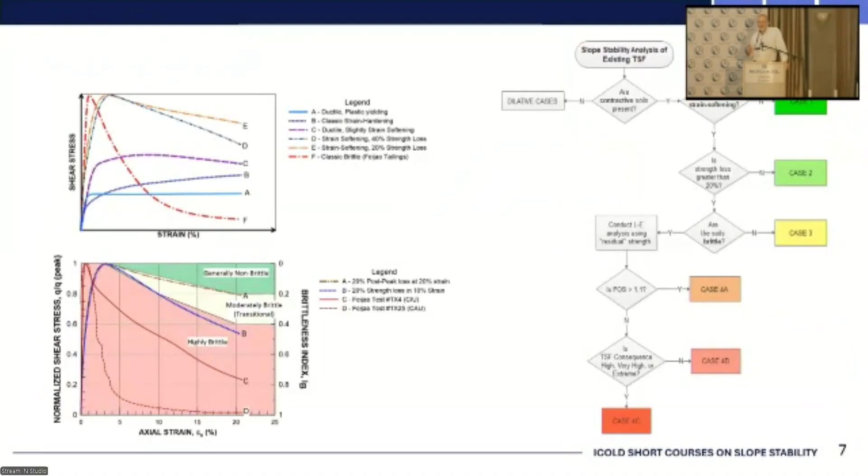And so that really forms the structural zone. The structural zone is that mass of material required to hold back or retain the potentially liquefied contents of the reservoir, which, with an upstream method dam, are likely going to underlie a portion of that structural zone. As Andy presented earlier, Appendix B revolves around this flow chart on the right.

The flow chart on the right is based on—again, I think you've seen a few slides—trying to recognize and respond to this very wide range of stress-strain behaviors associated with contractive soils. I guess the idea for this came from a statement in one of the papers by Peter Robertson: that not all contractive soils are strain softening, and not all strain softening materials are brittle. So that was a recognition that just kind of a broad catch-all phrase of 'if it's contractive, assume it will liquefy and assume it can fail' is insufficient—it's more of a recognition that you need to understand the actual stress-strain behavior.

The lower left-hand chart, from Appendix A, is our initial preliminary and interim characterization of brittleness. It tries to recognize that it's not just the brittleness index from Bishop that Andy talked about, shown on the right-hand axis, but also a recognition of the rate of strain. I was very happy to see the sensitivity analysis they ran with FLAC showing that the same level of strength loss would have a different result depending on the rate of strain. We tried to capture that in this framework.

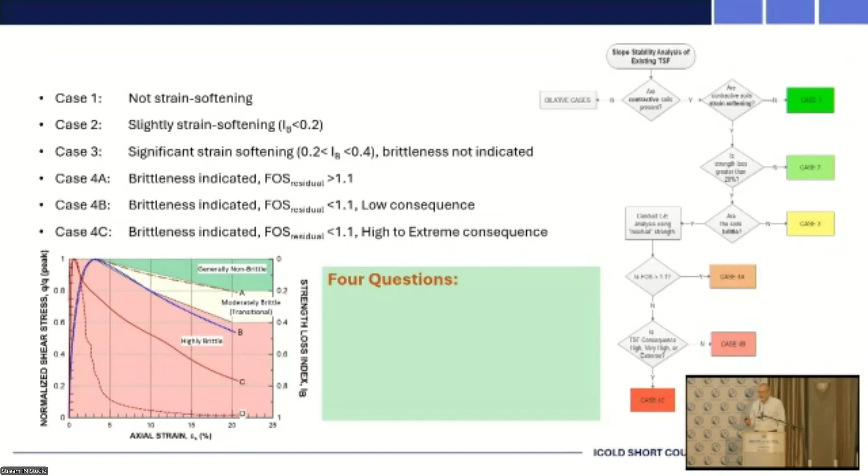So the 4 questions are: first, are contractive soils present? Second, are they subject to strain softening? If so, does the post-peak strength loss exceed 20%? And finally, can the soils behave in a highly brittle manner? Based on those, you have these different outcomes, and I'll walk through those as quickly as I can, trying to stay within the 25 minutes I said I would.

So to start off with, I won't spend a lot of time on this, but this is the non-strain-softening case. It would apply to either a plastic yielding situation where you shear up to a peak and then deform at a constant volume. That's the lower stress strain curve.

And then on the upper end would be actually a dilative material, so that strain hardening case would actually be a dilative material. What I really need to do for future presentations is show a quasi-steady state where you come up to a peak, then dip down a bit, and then start to strain harden again. That's really more the scenario we're looking at.

So we apply the minimum factor of safety of 1.5 for both peak undrained and also for effective stress conditions, which we could talk about if we had more time, but I won't get into that.

So the primary case here to consider is this peak undrained strength, as well as the drained condition, because depending on certain behaviors, the undrained strength could actually be higher than the drained strength. In that case, a drained or effective stress analysis would catch that scenario.

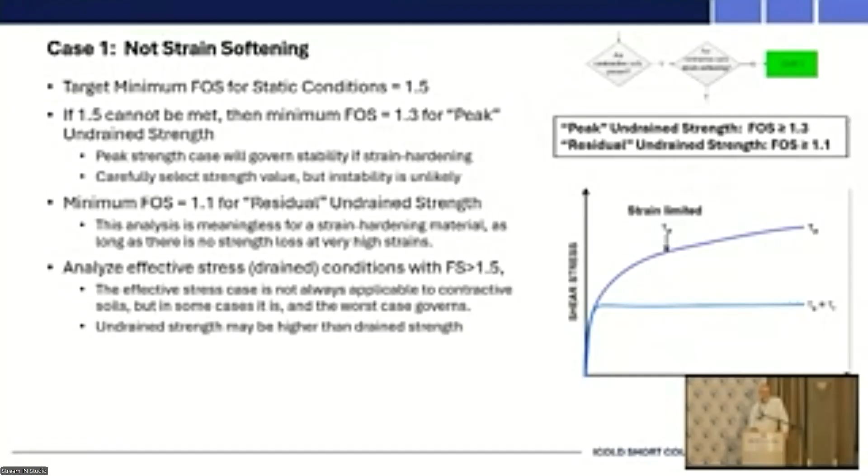Just keep in mind to make sure your strength parameters are appropriately conservative, and also be careful at high stresses because you could have some particle crushing, which would also lead to contractive behavior. So at high stresses, be careful about applying this.

Okay, case 2, I'm going to have to walk through this one. Will take a little time because I need to walk through the math.

So this is a case where you have strain softening with a brittleness index less than 0.2. If you remember that brittleness chart, that's the green area or the upper area that is less than 20% strength loss at 20% strain.

And so here the minimum factor of safety of 1.1 for residual strength is very important. If your factor of safety is greater than 1.1 and you have an appropriately conservative characterization, then the facility is stable. If it's less than 1.1, then you likely will need some form of mitigation.

Here, the minimum target factor of safety for peak undrained strength is 1.5, but if that cannot be met, then a factor of safety of 1.3 could be acceptable in certain situations where it's not prescriptively regulated against.

So there may be some regulatory requirement that does not allow you to use any factor of safety less than 1.5, or your owner may have some internal position that they are unwilling to yield on.

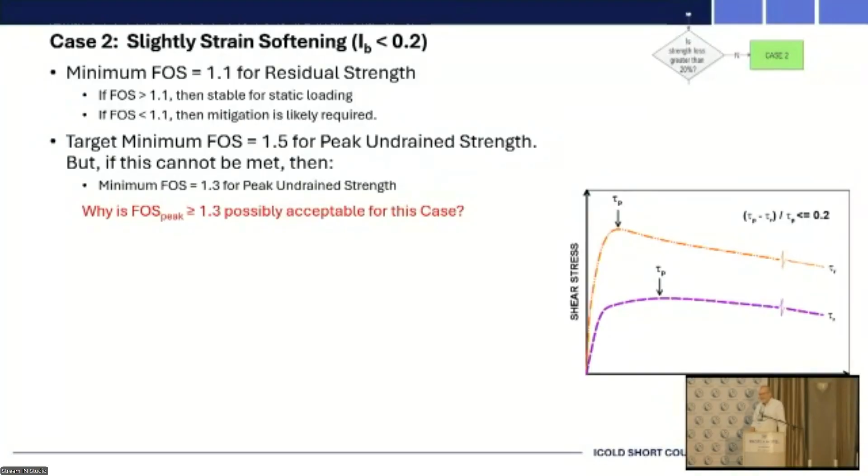But you ask the question, so why is a factor of safety of 1.3 acceptable for this case? It's not irrational, it's not arbitrary, it didn't come out of thin air. It's based on the observed behaviors that are represented by the stress strain curve. And so I'm going to walk through a little bit of a derivation as to how we got to that logical conclusion.

So if you'll think back to the brittleness index, which is the peak strength minus the residual strength divided by the residual strength, or divided by the peak strength. And if you apply basic mathematical principles, I'm not going to walk through them step by step, but you can read that in the paper or in the presentation.

You get to an outcome of peak strength equal to 1 over 1 minus the brittleness index, times the residual strength. And so if you divide by residual strength, you get the ratio of peak strength to residual is equal to that ratio of 1 over 1 minus I sub b.

And that can be defined as the sensitivity ratio. I just use sensitivity because it's easier to plug into these later equations.

And so if you have a brittleness index of 0.2, you can do the math, you get a sensitivity ratio of 1.25. If you have a brittleness index of 0.1, you wind up with a ratio of 1.11.

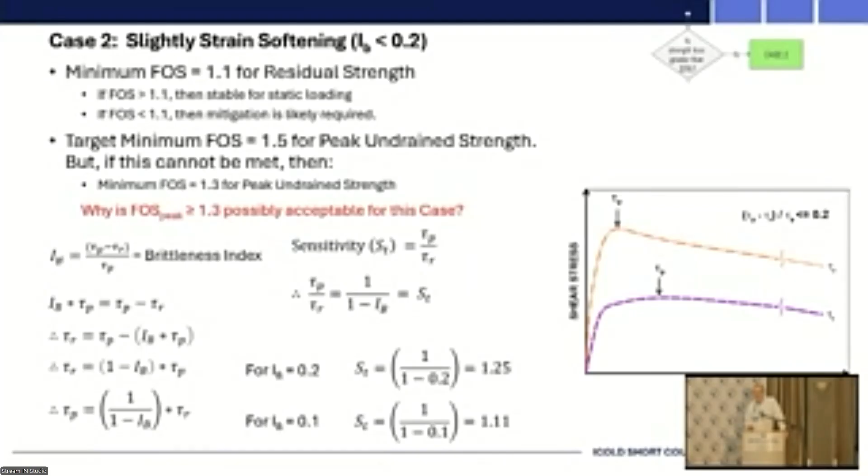And so now, one of these days I'll have an example of this, but think of a homogeneous embankment, or maybe one of those examples that Andy presented in his talks just now. If you'll accept that the ratio of peak to residual strength, i.e. the sensitivity, implies that the factor of safety at peak strength is going to be proportional to the ratio of factor of safety at peak over factor of safety at residual, that ratio is going to be proportional to that sensitivity ratio.

So if you have a brittleness index of 0.2, your sensitivity is 1.25, and you start with a calculated factor of safety of 1.1, then multiply that times 1.25, and the behavior is going to lead you to a factor of safety calculated of 1.38 for the peak strength. So if you just plug the numbers into the limit equilibrium analysis and nothing else changes, these are the results you're going to get. In this case, the factor of safety for peak is greater than the 1.3 criterion, and you've also met the residual strength. So the residual strength is the controlling case.

If you just started with a factor of safety of 1.3, and you calculated that, and then you changed the value to the residual strength, and nothing else changes, you're going to calculate a factor of safety of 1.04, which is less than 1.1, meaning you'll need to modify the slope to achieve 1.1. Then when you calculate the factor of safety for peak, you're going to get 1.38 approximately. If you don't believe me, go home and run an example case, and if you find a different result, let me know.

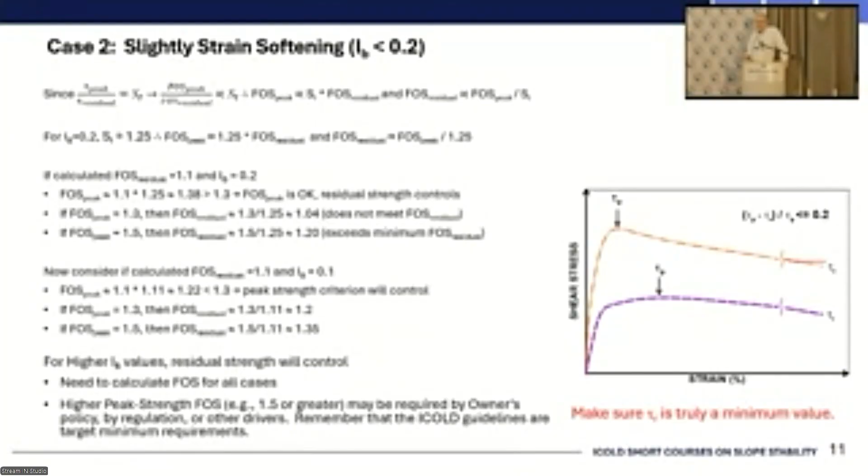I just kind of drew in a solid line there. I would much rather see that stress strain curve kind of taper off and become horizontal. I don't like to see that continuing to decline, so you need to use some judgment in picking your residual strength.

Okay, now for case 3, which is where we're starting to get into a higher level of risk and uncertainty. Again, we're in the range of 0.2 to 0.4 brittleness index. Again, the minimum factor of safety of 1.1 using residual strength is very important. If you're greater than 1.1, then it's stable.

If you're less than 1.1, there may be some value in running a deformation analysis because of the limitations of limit equilibrium that were presented, and it may be possible that if you have a marginal factor of safety, the deformation analysis may be useful to demonstrate that ultimately failure won't occur. That really goes to that definition of the limit state versus deformation-based criteria, if you will, that Andy talked about, that the deformation is a better representation of what really matters. The limit state is a simplified approach.

Now the ICOLD table 7.1, or maybe 7.4, actually recommends this factor of safety for peak conditions greater than 1.5. And now here it's important to note, and this has been said before, and actually Dr. Morgenstern said sometimes factor of safety 1.5 is okay, and sometimes it's not high enough. And this is a case where a 1.5 would not be enough.

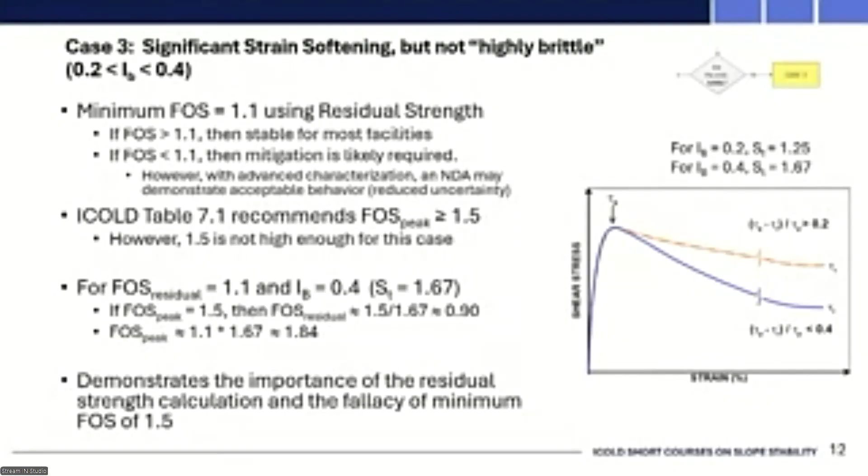This is again where I've had arguments with people smarter than me, but I think they get lost in taking a very hard, adamant position that we must have a factor of safety of 1.5, when 1.5 is not always going to be adequate if you have brittle conditions.

Moving on to cases where you have a brittleness index greater than 0.4, or greater than 40% strength loss, you could go through the same type of analysis. I have in previous analyses shown that if you have a brittleness index of 0.8, you may need a factor of safety for peak conditions greater than 4.

It really drives home that in cases where you have highly brittle materials, understanding this residual strength factor of safety and really understanding the characterization matters, making sure you have a fairly high degree of confidence in your characterization. And if you do have a high degree of confidence and you still have a factor of safety less than 1.1, then you have a real problem that you have to address.

So for initial screening analysis, it's appropriate to consider a near lower bound. What is near lower bound? I'm not going to tell you the exact number. It might be a 5th percentile, a 10th percentile, but certainly not greater than a 20th percentile value for that residual strength.

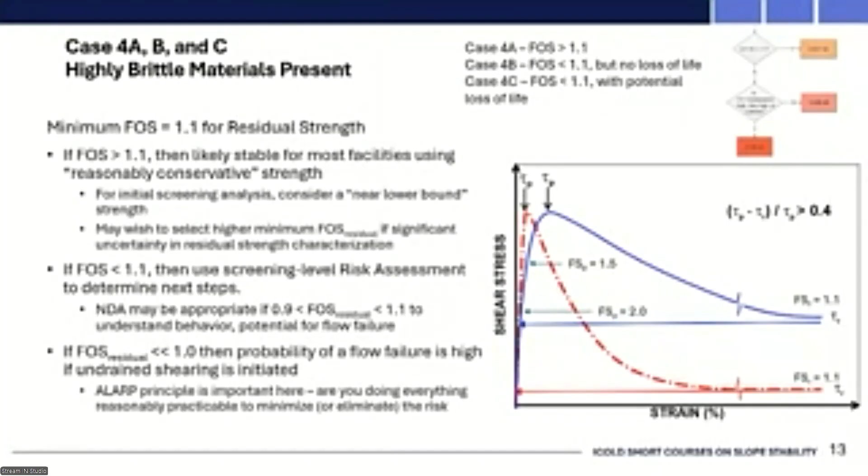The reason many people, especially owners, get very nervous when they have highly brittle materials and they're applying this factor of safety of 1.1 is the mobilized shear stress is down there where that red arrow is pointing. That means your factor of safety for peak conditions might be 4. So they look at that and say, you're being way too conservative — a factor of safety of 4 is unrealistic.

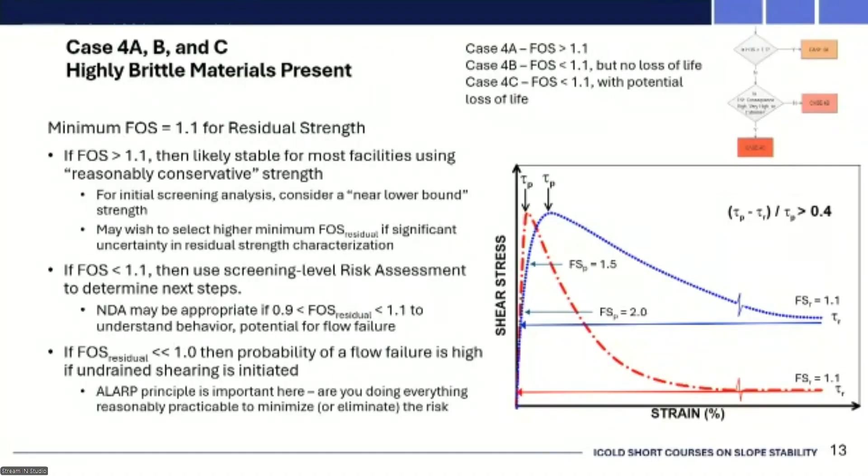But the problem is, if you truly have a brittle material and you go over the peak, that is disaster. And that's what we again saw from Brumadinho and others.

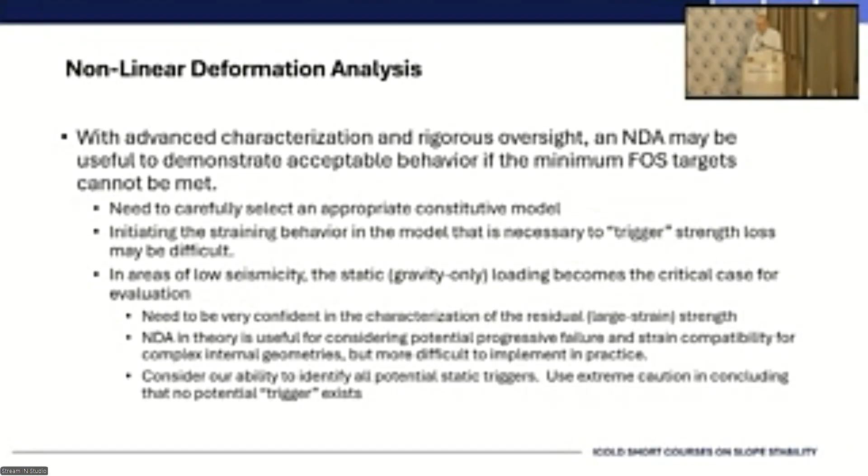Wish I had time to go through this, but I don't — you're going to see examples of nonlinear deformation analysis this afternoon, and there are a lot of cautions that should go along with that. Tom and I were talking about this at the break: there's a lot of potential with nonlinear deformation analysis, but it's a case of garbage in, garbage out. If you don't understand what you're putting into the model and it's not well developed, then it will be of limited use. That's all I'll say on that.

Also, I don't really have time to go into seismic loading. Andy Small has covered a bit of that, but there's guidance in the bulletin and in Appendix B on how to approach seismic loading for these different cases.